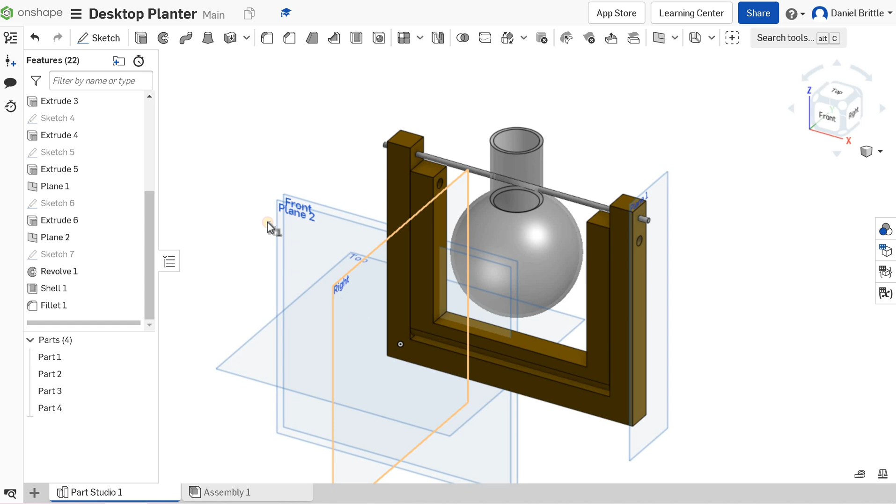Then have a go with all the colours and you can get it to look just like this one, which is good. And you can play with the transparency to make the vase look that little bit more realistic. What we need to do before we can assemble though is put a hole in the side of the vase. So to do that, we're going to click on the right work plane and we're going to create a new sketch. I'm going to look at it from the right as well, so that when I create the sketch for the hole, it's going to be bang in line with the bar that's going to go through it.

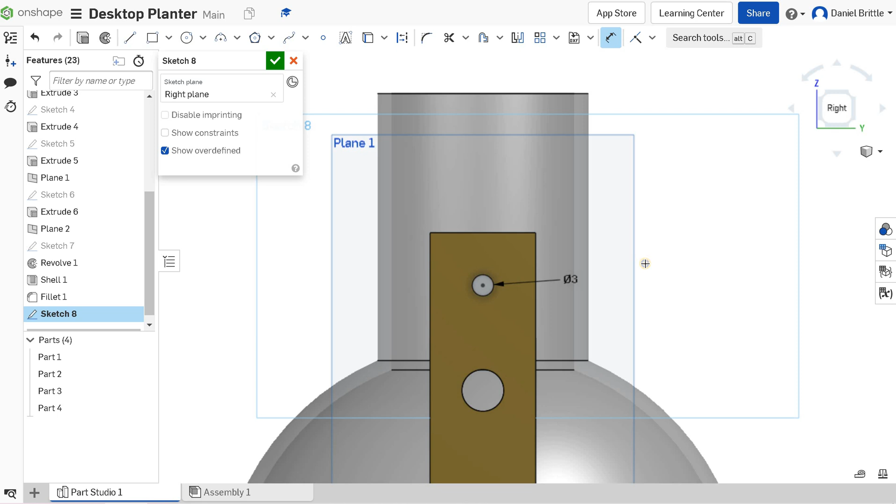So I'm going to draw the circle, lock to the centre of that, so you'll see the orange square, draw the circle out, and the only dimension you then need to put on is the diameter of the circle, and it's exactly in line there now. So with that sketch, we know it's right, so I can finish there, extrude, sketch 8, and we're going to make sure that that is through all. Okay, we don't want it as a new part, we want it to remove.

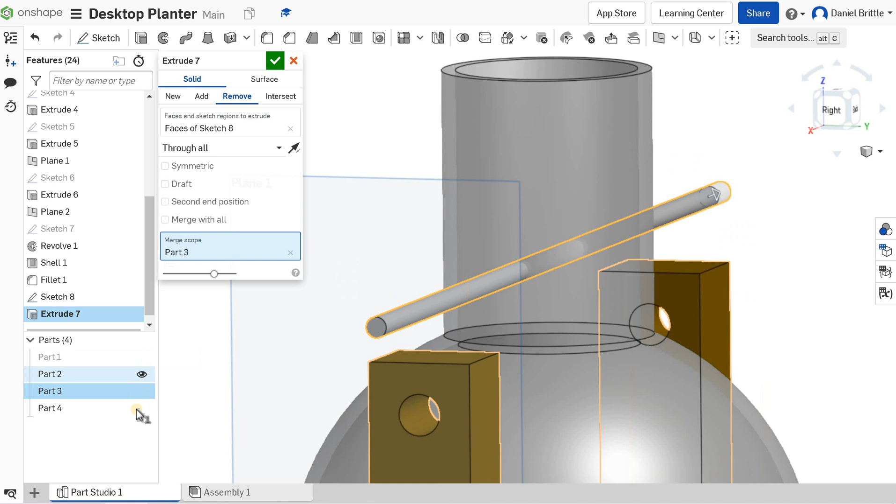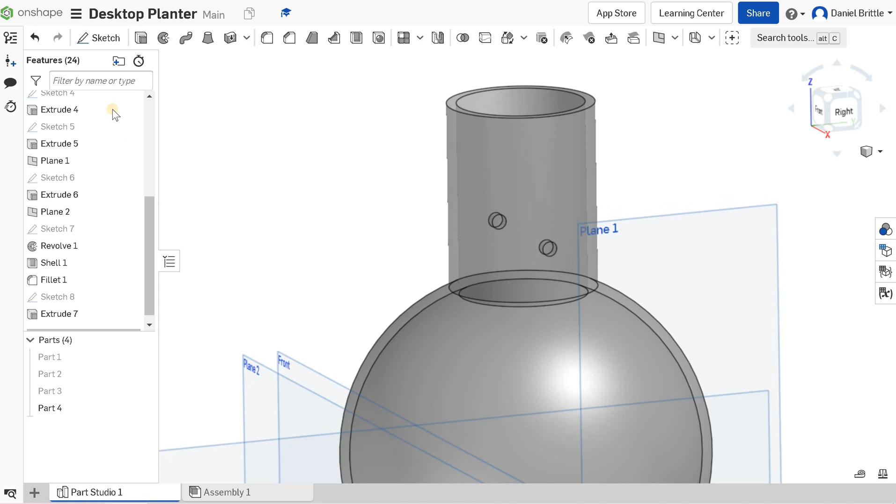The merge scope then is going to be with the vase, so merge scope is already picking it up as part 3. And just to double check, let's hide the other parts and we'll make sure that we're the right part. So it's actually part 4 that we're wanting it to merge with. So if we cross part 3 from the list, we'll select part 4. We need just to change the direction of the hole, and you can see it's creating a hole in the vase now. So we're happy with that. We can click tick. Okay, so it won't look any different by the time I unhide everything else. You shouldn't be able to see too much except those parts that make it line up quite nicely with the bar.

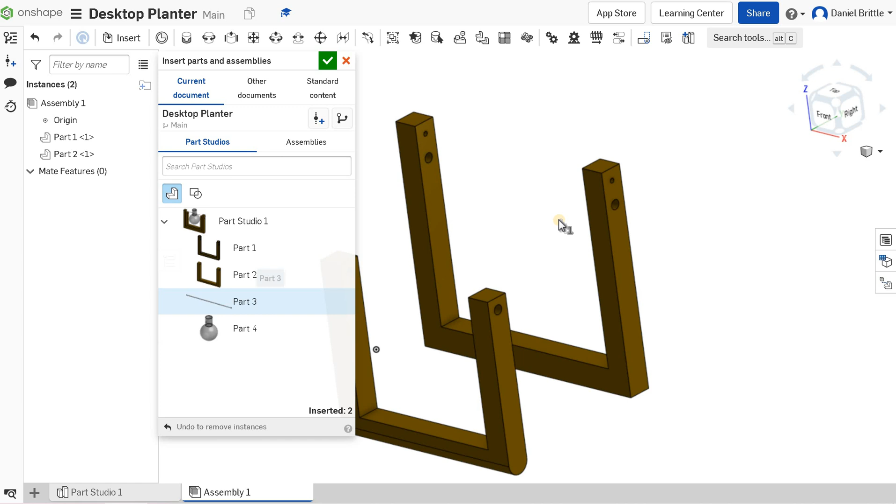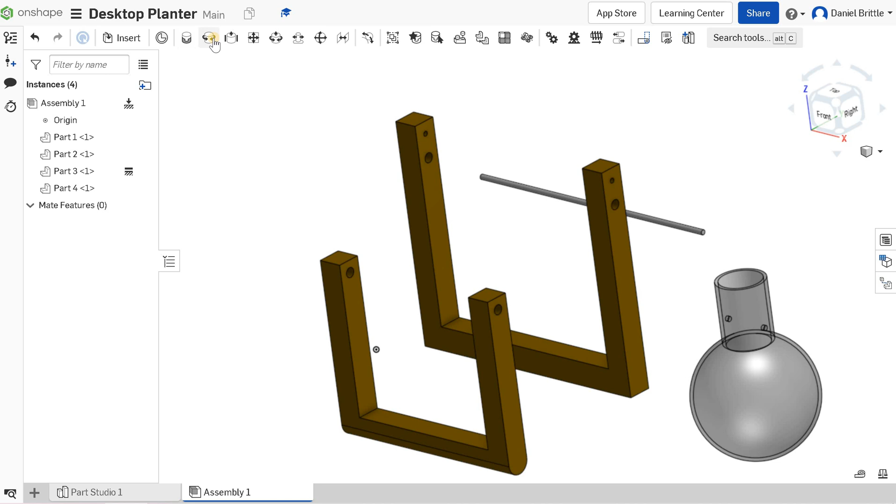So if we go over to the assembly now, hopefully by this point you're a little bit familiar with assembling parts. So we're going to insert all of the parts that we need. So part 1 can go in, part 2, part 3, and the vase part 4. What I'm going to do is build it all around that bar because it'll just make it animate that little bit easier. So I'm going to right click and fix the bar. I'm then going to use the revolute or the fastened mate. Either one should work for the bar to go in place first. So let's use revolute mate, which will probably be used for all of our mates in this tutorial.

So we're going to select the end of this bar, and that's going to correlate with the end of this, although we do want to offset it, because as we do that first, it's lining up exactly flush, and we actually want it sticking out 6 mm at either end. So with the offset, we're going to make that 6 mm and see where that puts us. So we're 6 mm there, perfect. I can click tick, that revolute mate's done.

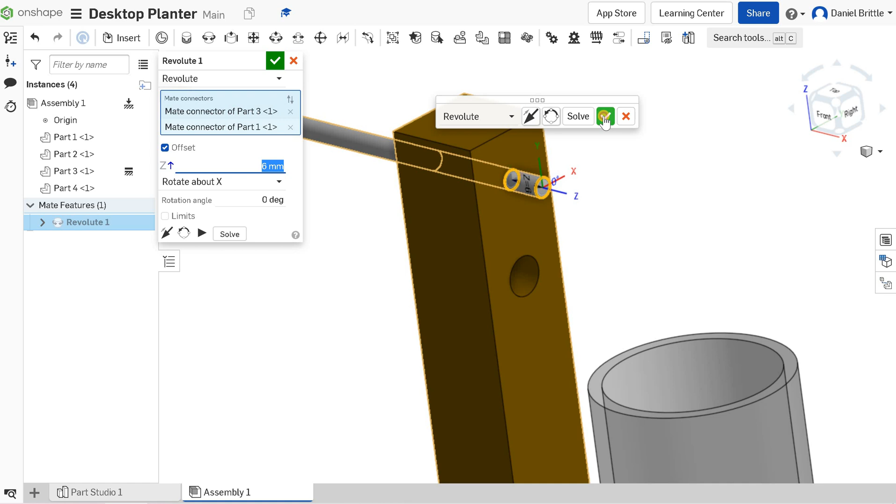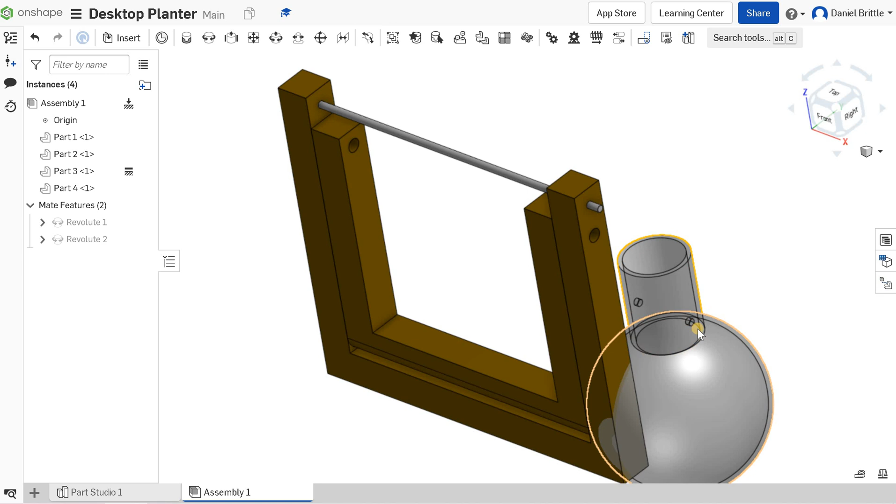The next one, the outside of this hole, is going to be the inside of the larger hole here. So just making sure we're really pedantic and clicking the correct central part of the hole. It's really easy to click on the wrong bit, and that's where a lot of people make mistakes. So we can finish that revolute mate, and that one's in place. The last one now is going to be this hole here. So I'm going to select the inside of that with this bar. I've ticked my revolute mate, so that's not done anything at all. So I'm going to click back on my revolute mate.

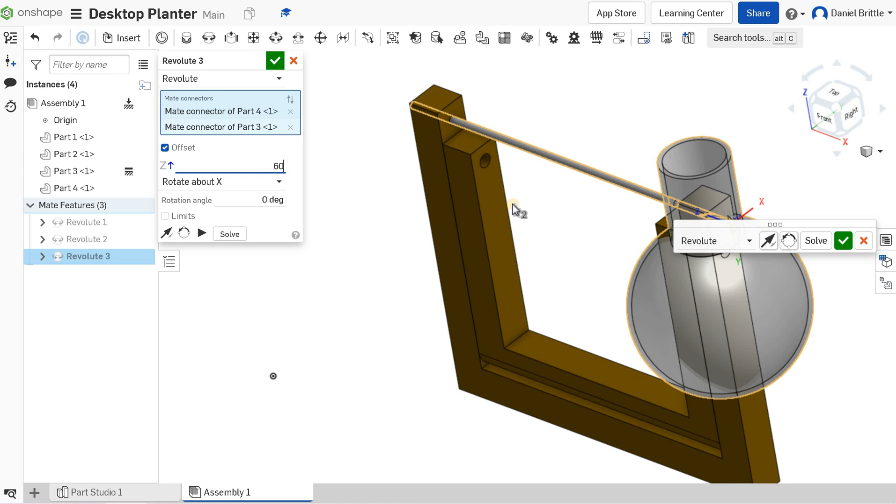Zooming in on the outside of that hole, I'm going to line it up with the outside of this bar. Okay, obviously that's not where we want the vase to stay, but we're going to use that offset tool again and just move this along, let's say 60 mm to start with, and see where that ends up. Look at it from the front, we're not quite in the middle, so let's try 70. That's exactly in the middle now. We can click tick, we're happy with that.

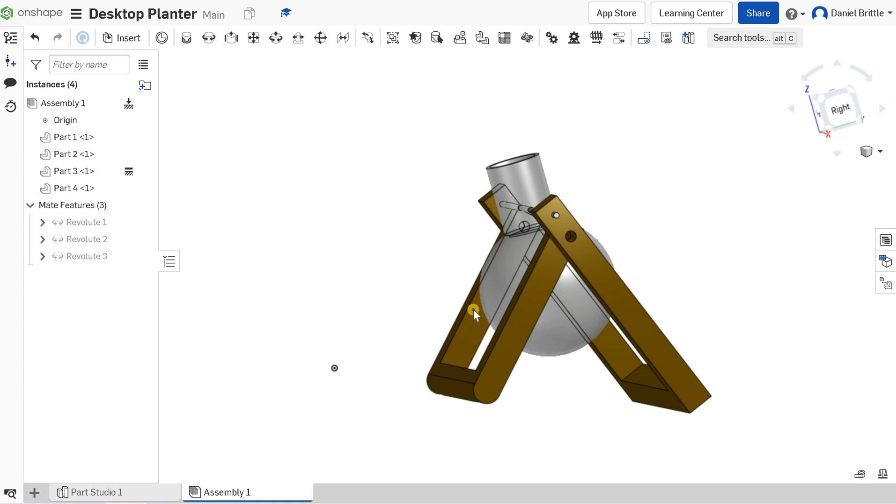Now that we've finished assembling all of it, we can just start to drag and move parts around until we're happier with the way that they look. So you can see that if we're standing this on a desk, it's going to look something like that. We can revolve that so it's looking more vertical, and then adjust it to a nice angle for the picture.

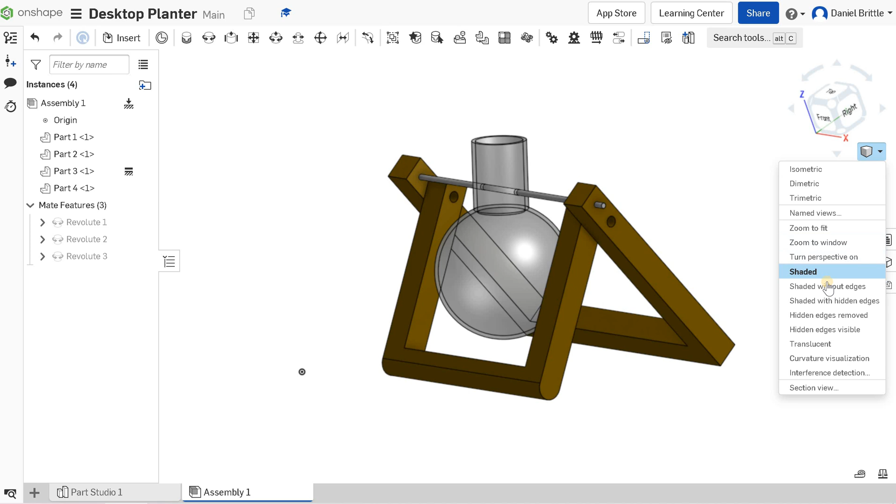And there you go. We can have a render of that now taken, a screenshot if you will, taken for your portfolio. If we turn off edges as well, so where we've got shaded without edges, with hidden edges, all sorts, we can go shaded without edges, and you can see that you get the full effect of the vase, and you can change the appearance back in the Part Studio to make it more or less translucent.